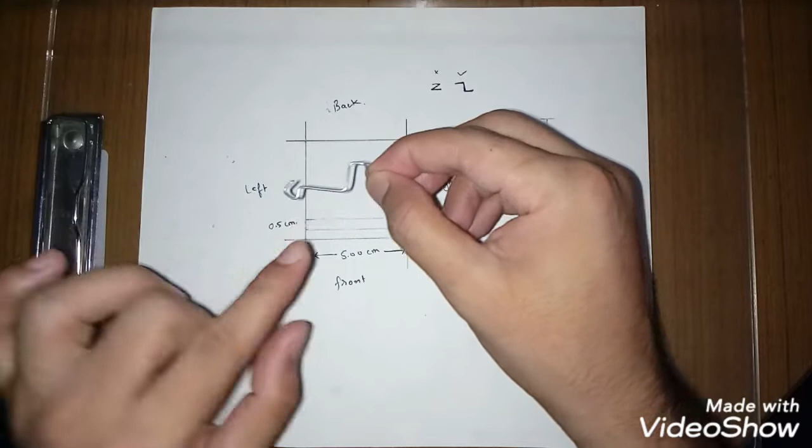First I want to show you the crankshaft that I have made. Yes guys, this is the crankshaft, and this portion of it will go into the body of the ornithopter. It will work like this. I am going to keep it here.

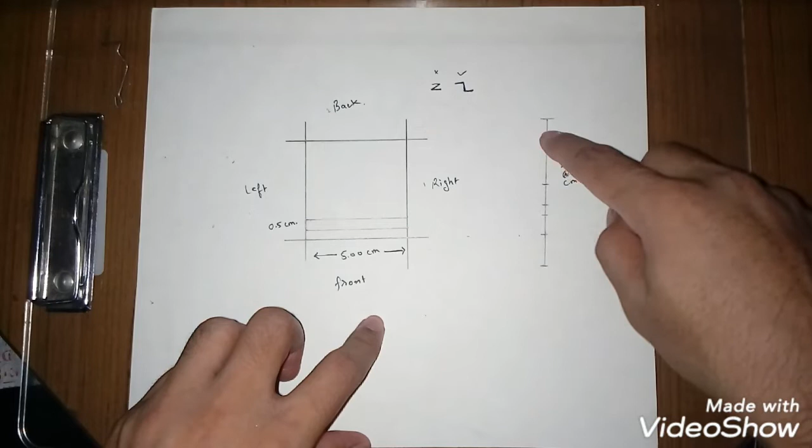So guys, how can we make our crankshaft? First we have to draw a 5 centimeter square on a blank paper like this. I have also marked the areas: right, left, back and front. You can see I have kept two marks here of 0.5 centimeter. This measurement I have kept for the wire: 3 centimeter, 1 centimeter, 0.5 centimeter, 1 centimeter, and the rest portion of the wire. So guys, all these will help us make our crankshaft.

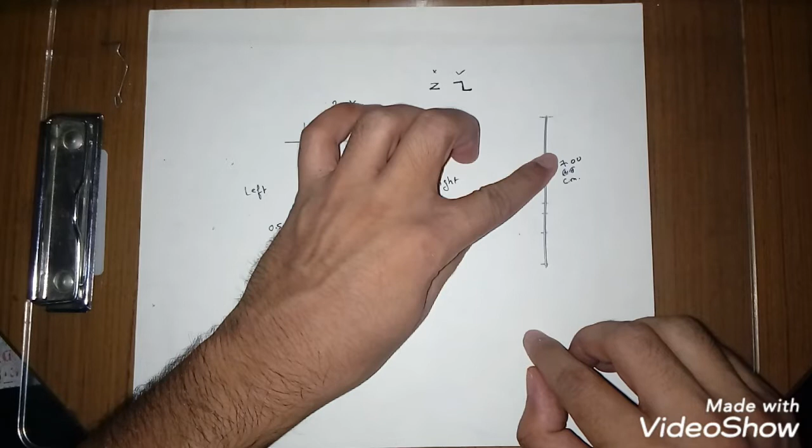To make the crankshaft, first we have to take an aluminum wire of 7 centimeters. I have already cut it, you guys can see. First we have to leave 3 centimeters.

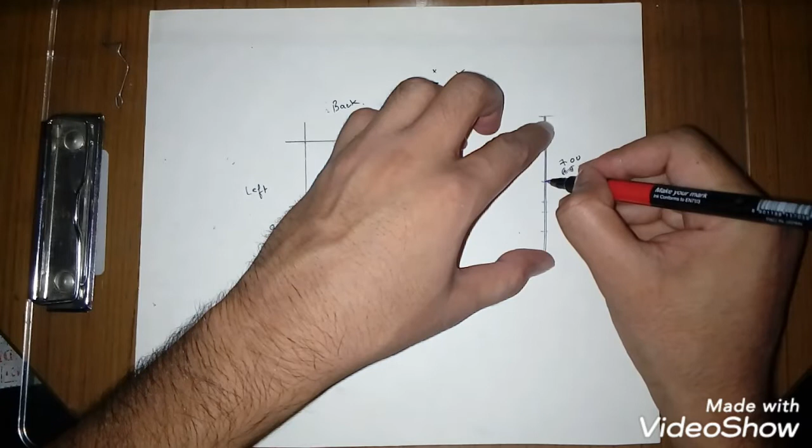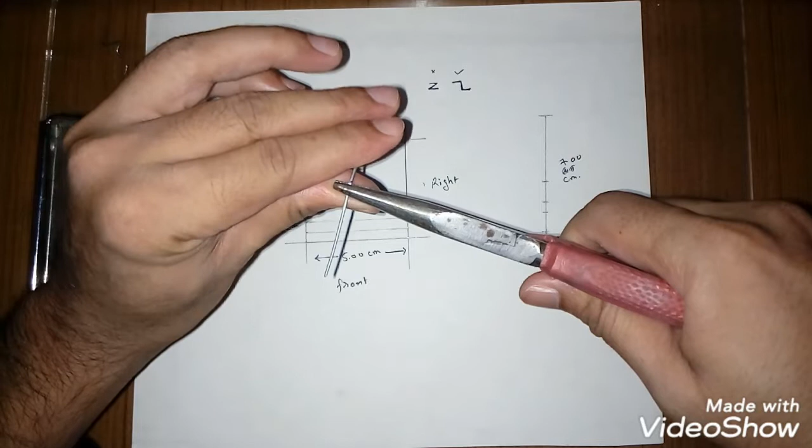Make a mark on the wire like this, and hold it from inside of that mark. You can see the mark here, and bend the wire downside at 90 degrees. Here we have to keep in mind that whenever we bend the wire, it needs to be at 90 degrees, like this.

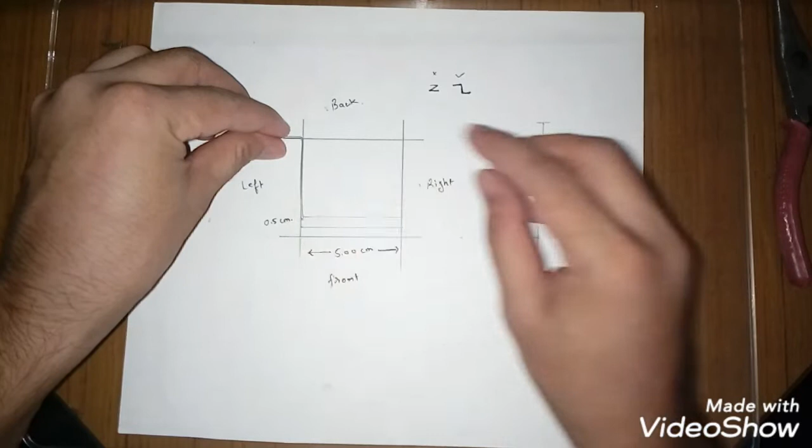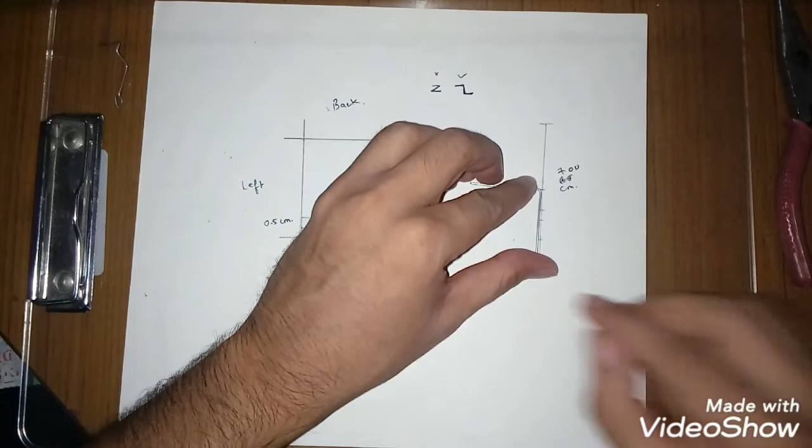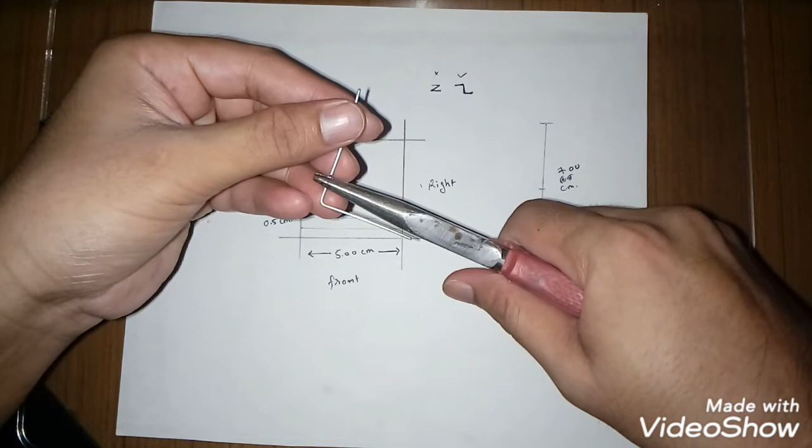Now again we have to leave 1 centimeter. Hold it tightly, like this, and bend it downside in the opposite direction of the first one. It will look like a Z, not this Z.

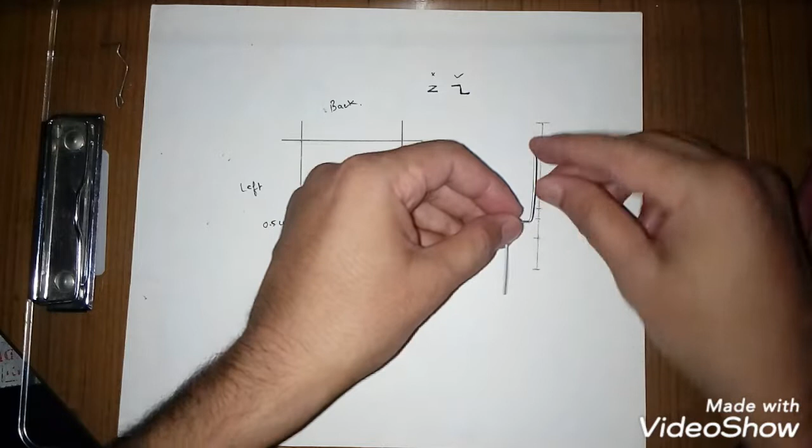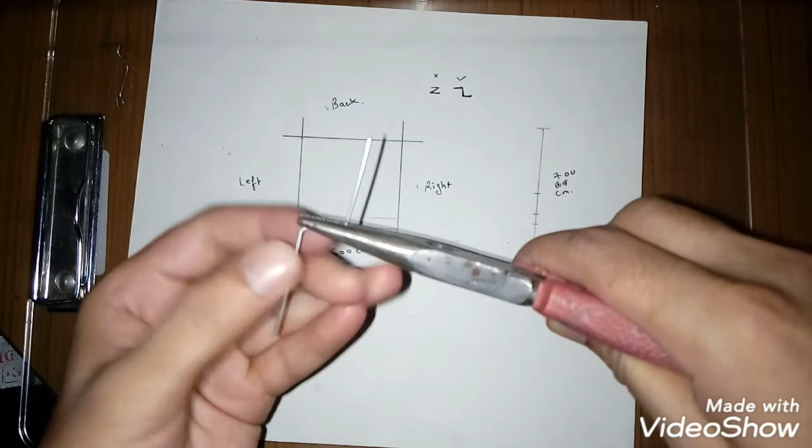Now again we have to leave 0.5 centimeter. You can see. Hold it like this, and bend the wire upside. Once that's done, keep it on the square. You can see that its tail portion goes in the right direction.

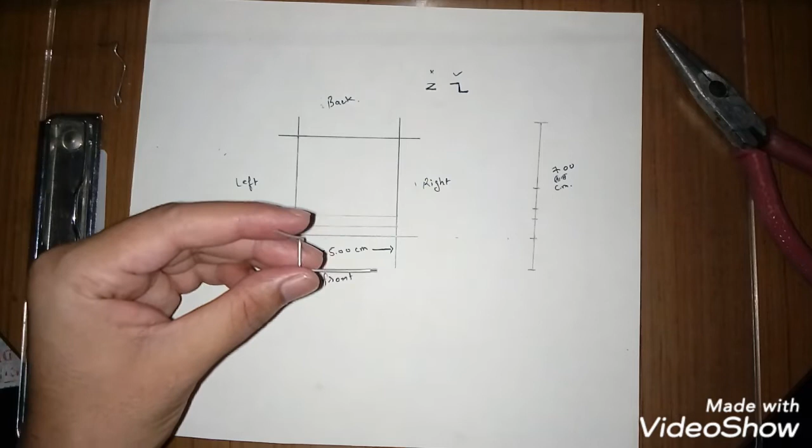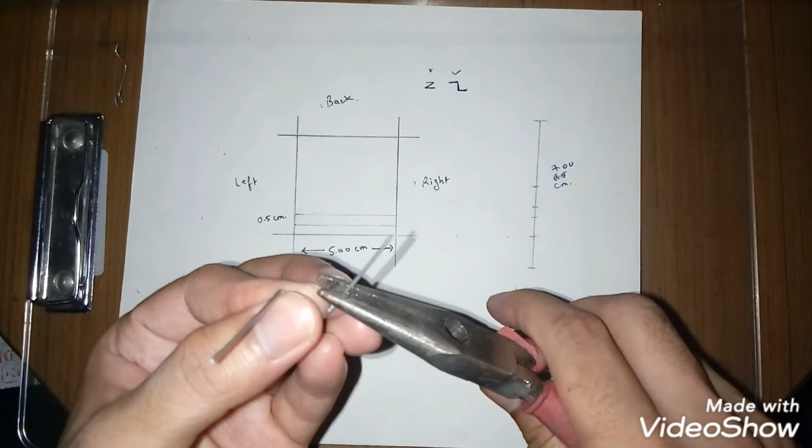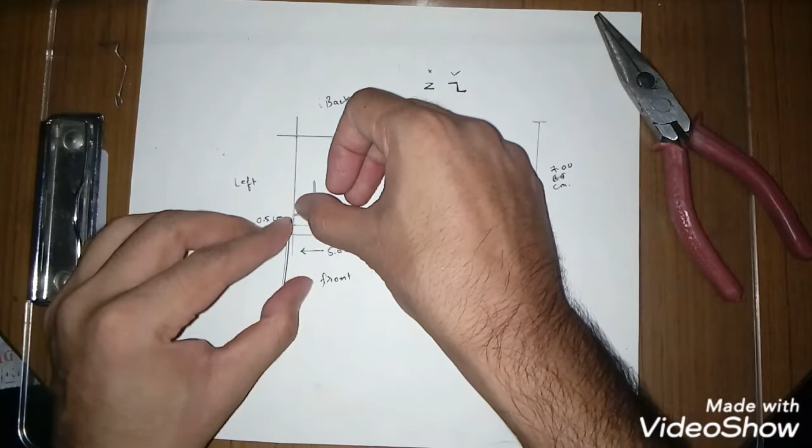Now again we have to leave 0.5 centimeter, hold it tightly, and bend the wire downside. Once you bend it, again keep it on the square. Now its tail portion goes in the back direction, like this. This is its top view, so you can get more idea.

Once this is done, our crankshaft is almost ready. You guys can see it's working.

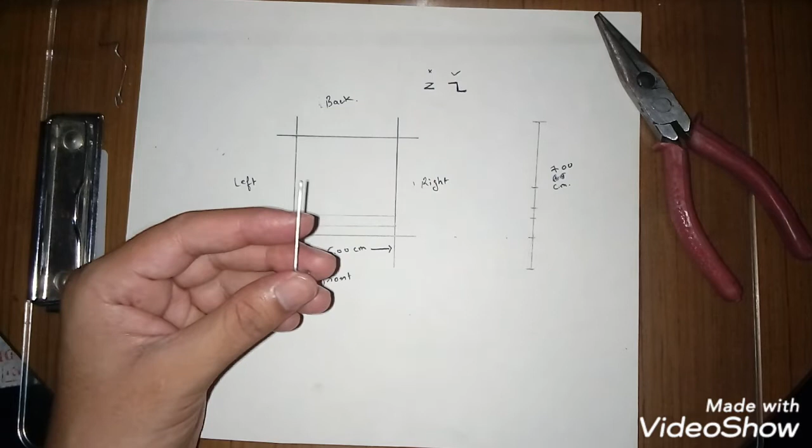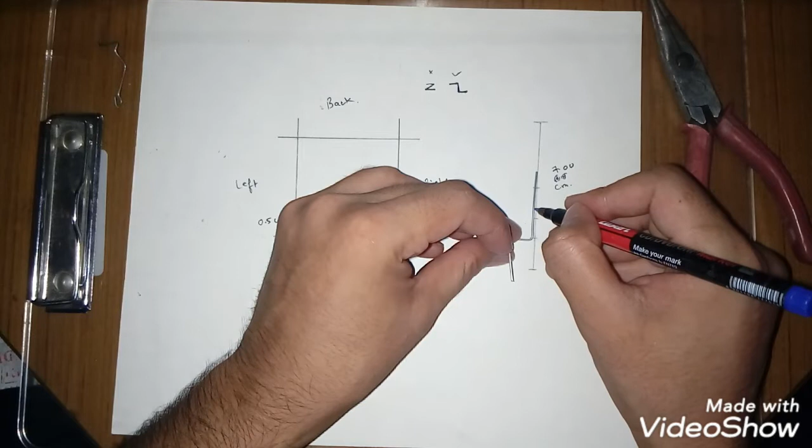Now I have to make its hook portion. For that, first we have to leave 1.5 centimeter, this 1 centimeter and 0.5 centimeter. Mark it first. Once that's done, bend the wire downside.

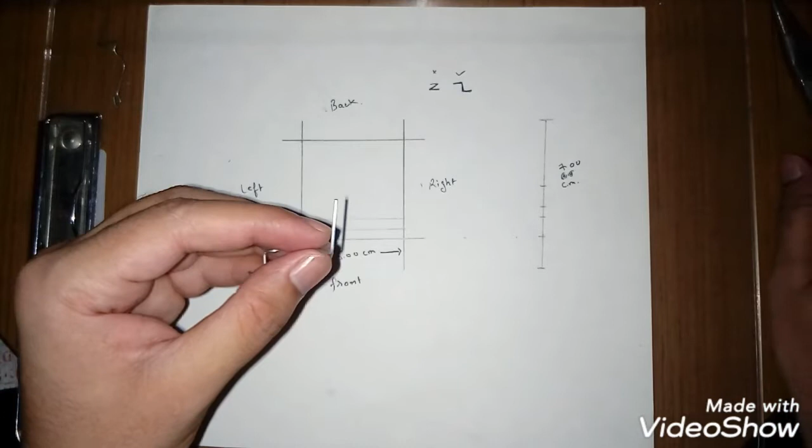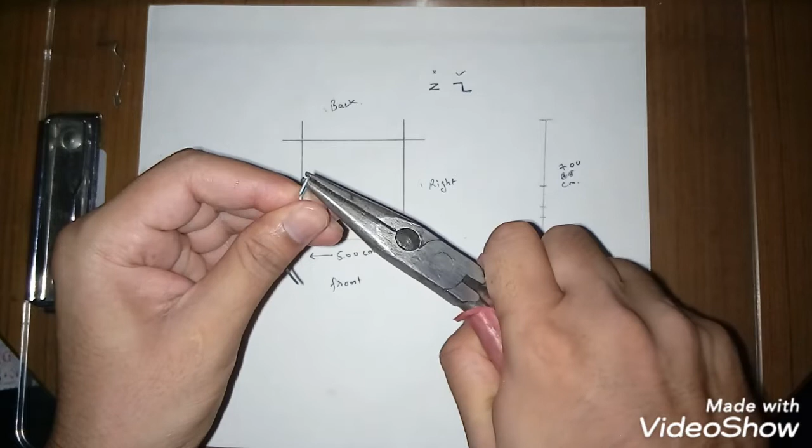To make our hook, we have to bend the wire twice to upside, like this. Yes guys, our hook is ready now.

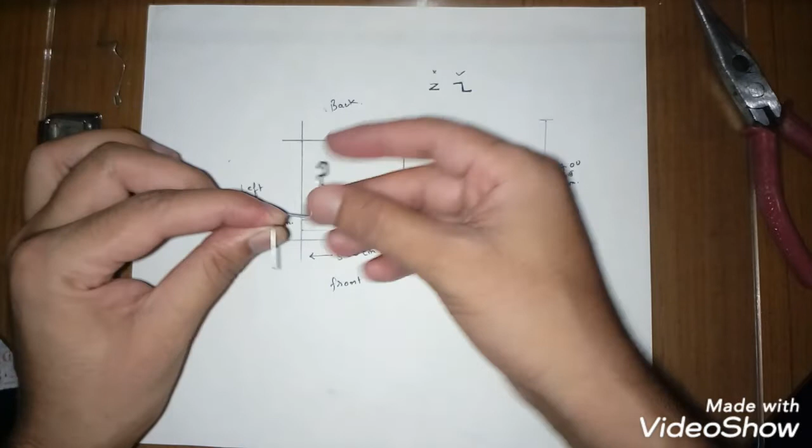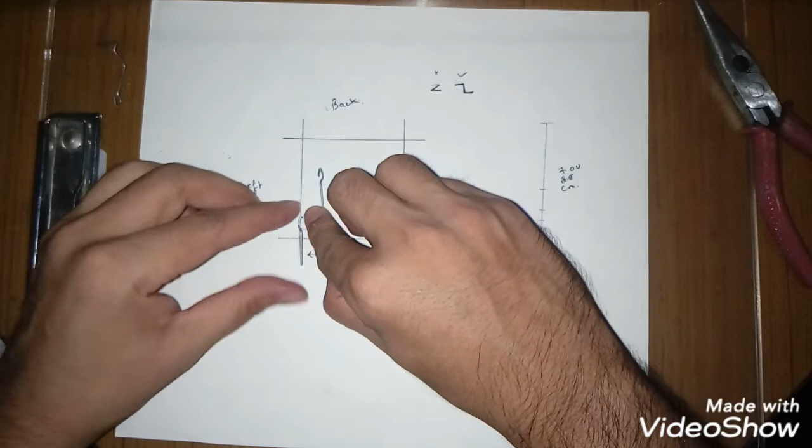Once we're done with this, keep it on the square like this to check whether we have done everything correctly or not. You can see the below portion of the crankshaft, this one we have to bend and slide inside of the square. It needs to be 0.3 centimeter. Yes guys, we have to bend it so it will look like this.

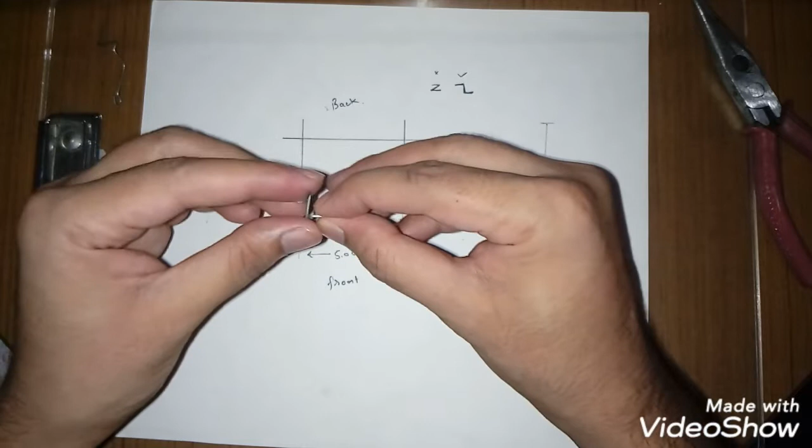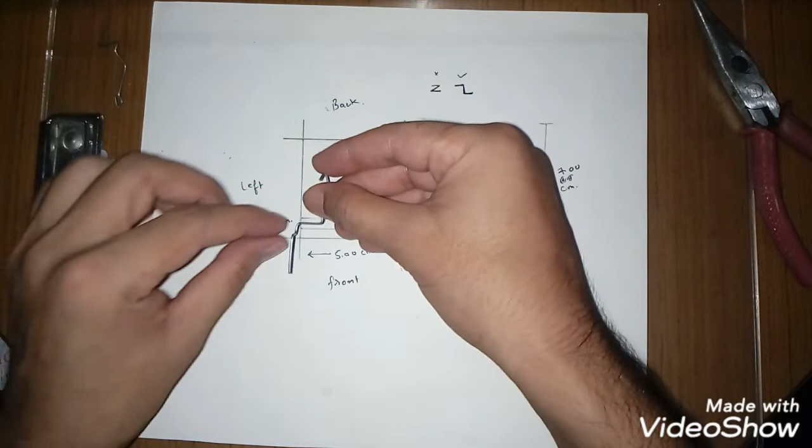You can see it from this angle. I have bent it, and if you check this angle, you can understand that we have to bend it to at least 10 to 20 degrees. Once this is done, our crankshaft is ready. So have you guys realized that we made it without any confusion, in a very simple and easy way.